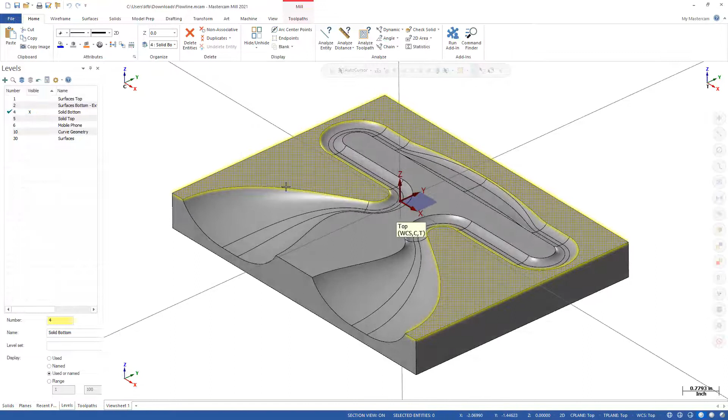This particular file has some geometry that is very suitable for the flowline toolpath. It's a solid file, but I can turn on level 30 and make it active, and turn off level 4. We have a copy of the geometry we want to focus on, and I'm going to hide everything else. So these are surfaces.

If I hit Alt-S to unshade my model, now I'm looking at the wireframe version of it. You can see that most of the surfaces have what I call a grid structure. We have arcs or curves that go across, and arcs and curves that go along. Now these aren't really arcs or curves, they're just a representation of the surface itself.

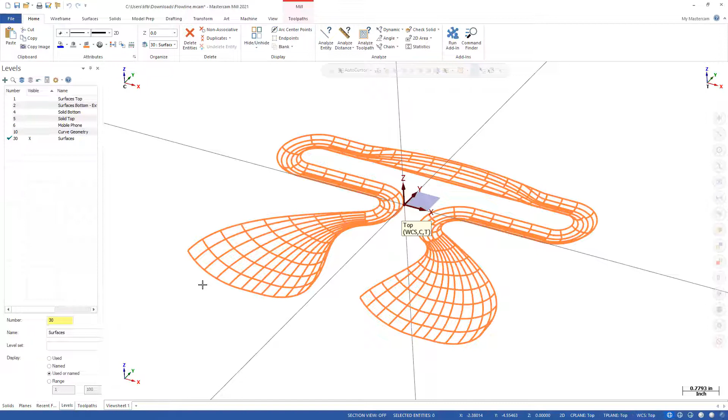Now if we look closely in this area, this seems to have a nice set of what we call UV curves. The UV curves are created on the surface and they show the overall flow of the surface.

But this particular surface here does not have a consistent across and along motion. In other words, we don't have curves that are going all the way around like we do see here and here. And if I tried creating a flowline toolpath, it would either cause errors or give undesirable results because of this anomaly we have here.

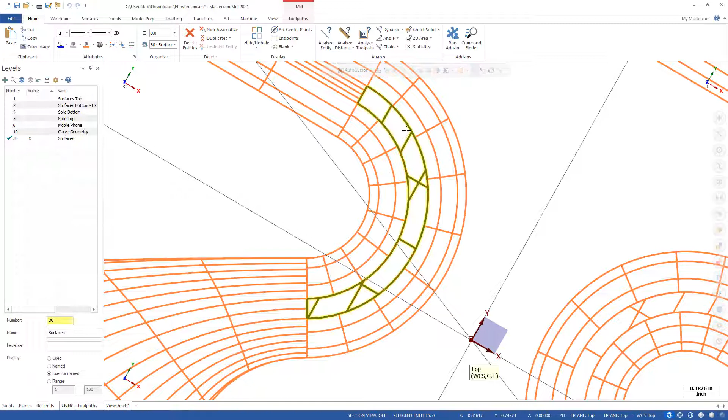You'll also notice we have the same issue over here. And if I zoom out, we have the same issue right here as well. So let's go ahead and hit Alt-S again to shade it, and I'll fit this to my screen.

One of the things we can do before we create the flowline toolpath is adjust the UV curves that form this surface. So if I go to the Surfaces tab, we have an option here called Reflow UV. However, Reflow UV utilizes wireframe geometry to guide it along the surface that you want.

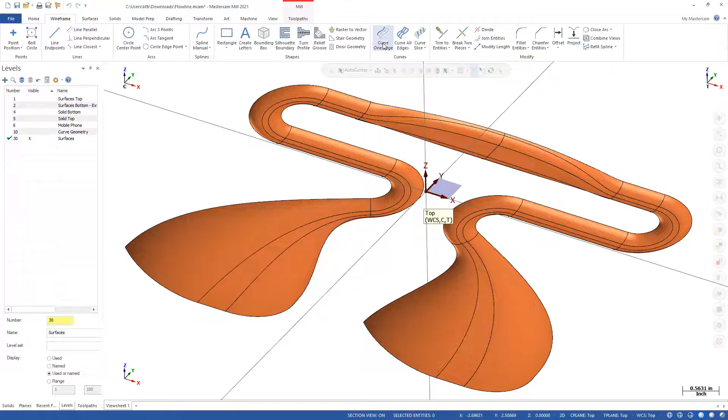So the first thing we need to do is go into wireframe and create curves along these edges. Now I'm in 2D, I'm going to change this to 3D, and create a curve along these 4 edges here. And while I'm at it, I'll do it over here as well, since we know that this was the other surface we need to work on.

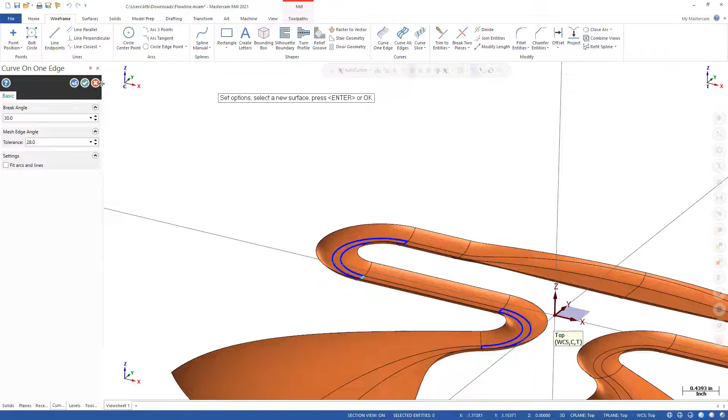Now on the Surfaces tab, I'll go to Reflow UV, and it's asking for a surface. Notice before I select a surface, I have boundary curves selected here, which means as soon as I select a surface, it's going to prompt me for those boundary curves. You can see right here, select up to 4 chains. So I'm just going to select these 4 here.

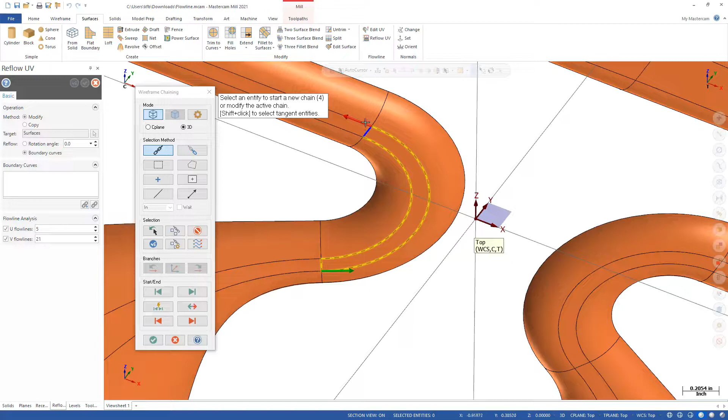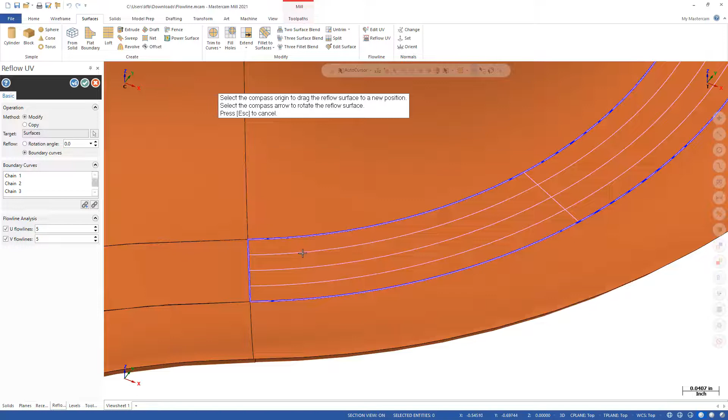When I click OK, you'll notice if I zoom in, we have a lot of curves, but they follow the outside shapes of that surface. So I can adjust this, for example, let's just do 5 V flow lines. Now you see 1, 2, 3, 4, 5. As you can see, we're reflowing the UV curves to better follow this surface.

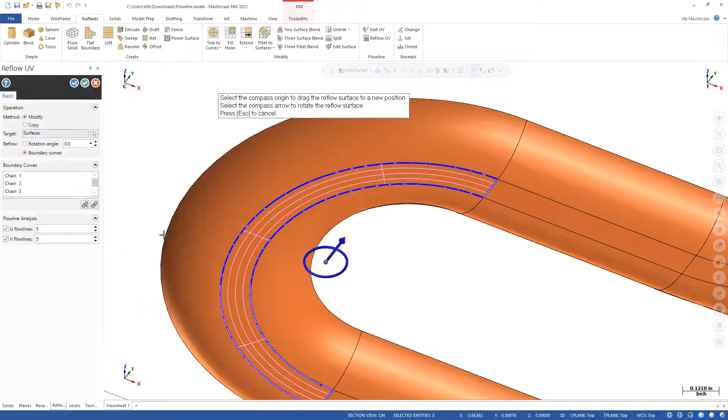So I'm going to hit apply because I want to do it again over here. I select the surface, and I'm going to select these 4 curves. It looks real good, so we'll click OK.

So now, let's take a look at the surfaces again in wireframe mode.

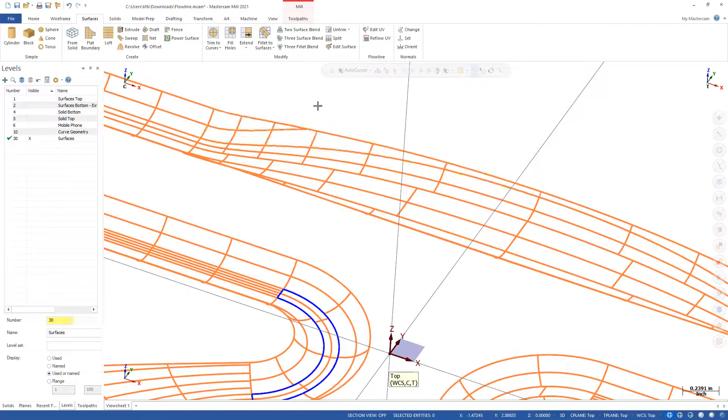And everything looks good. Sometimes you'll see that you have a curve that shows up here and it terminates. That's kind of what the toolpath will do. Imagine if you had a tool come along this shape and then stop and retract. I'll point that out because we may see that in the end result. And we're not going to go in and modify the UV curves of this surface, but we certainly could.

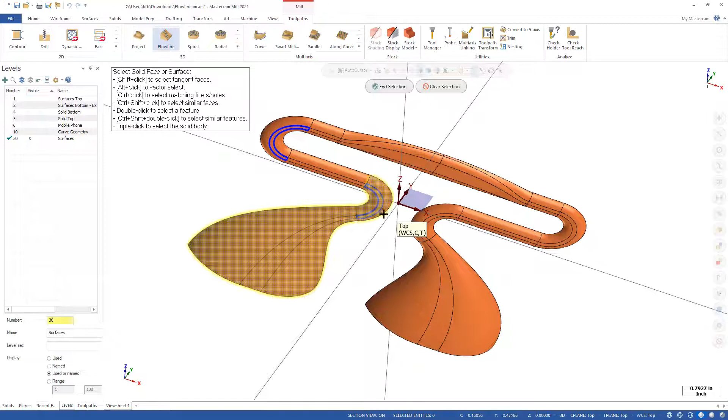So to access the toolpath, we go to Toolpaths, and then it's under the 3D gallery, and it's called Flowline. I'm going to select these surfaces here. Of course, I could window select, but I'm not going to select every surface, which is why I'm not window selecting. And I forgot that one. So we got all the surfaces.

Now when I hit end selection, we get this toolpath surface selection window that pops up. This is a little different than what we've seen in the past, and this is specifically for a Flowline toolpath. The big option down here is what I utilize a lot. It's called Flowline, and here's where you can look at the various contours or flowline data of the geometry selected.

So as an example, let's move this over here. We have cut direction, and by clicking on it, it'll alternate. Now the cut direction is along the shape. Imagine if this is the river and the water is flowing along the river - that's how this cut is going to be made because of the cut direction. If we change this again, we're now going back and forth across the river. So we're going to change this back.

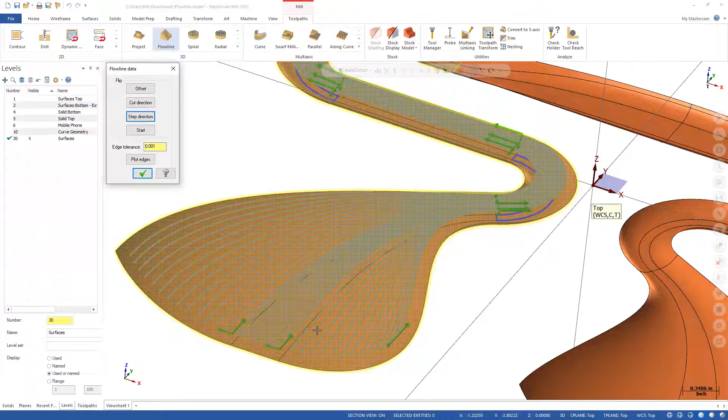We also have offset, if you wanted to offset it below or above. And step direction, if you wanted to start up here and go to the right, or start here and go to the left. As you can see, we have the cut direction going this way and the step direction going down. So we should see that with all of these pieces of flowline data, and we see it for all of these as we go around to the end.

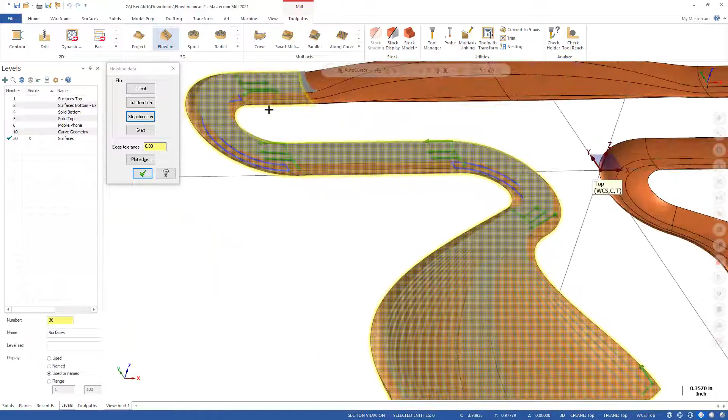So, as you've gathered by now, what I like to do is click OK and go into the toolpath, and we can always make changes later. So we have the 15 drive surfaces. And if we wanted to do a check surface, which would be a surface to avoid, we could add that. I'm just going to click OK and go right into our surface finish flowline parameters page.

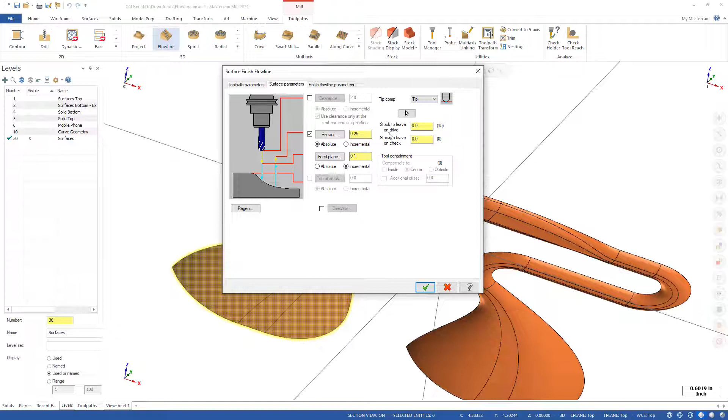We're going to use a 1/4 inch ball end mill. Let's call this flowline. Under the surface parameters, we have our traditional settings for stock to leave on drive surfaces and so forth. But under the finish flowline parameters, here's where we can choose our step over and our cut control. For now, I'm just going to accept the defaults and note that we have zigzag turned on. And I'm going to click OK.

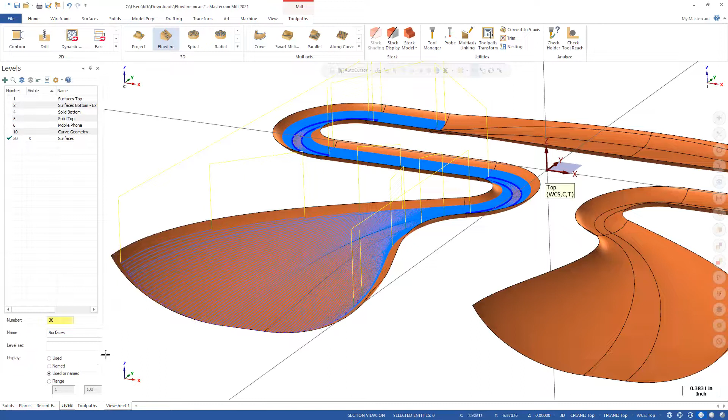So what we have here as a result is some pretty efficient and very smooth flowing toolpath motion that follows the overall shape of this surface. If I go to the Toolpaths tab and I backplot this, I'm just going to hit play. You see how it goes back and forth along the entire shape of what I call the river, from one side working down to the bottom, and then back up the other side.

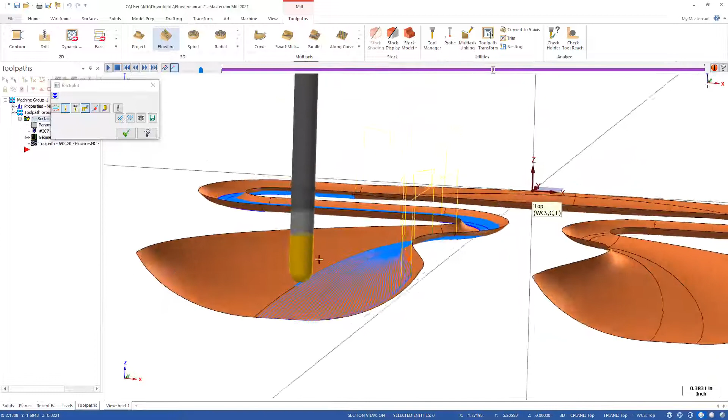Now if we look at some of these retract moves here, we can control that with our gap settings and possibly even changing the flowline data. If I click OK here, in shade, you'll see that we have the nice flowline data that goes all along this surface, and it continues on all the way around.

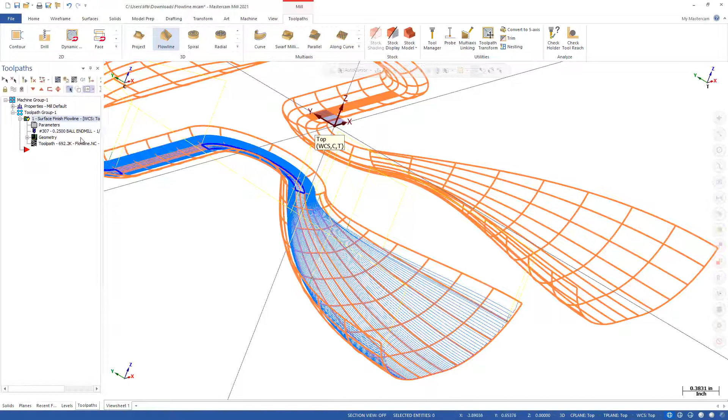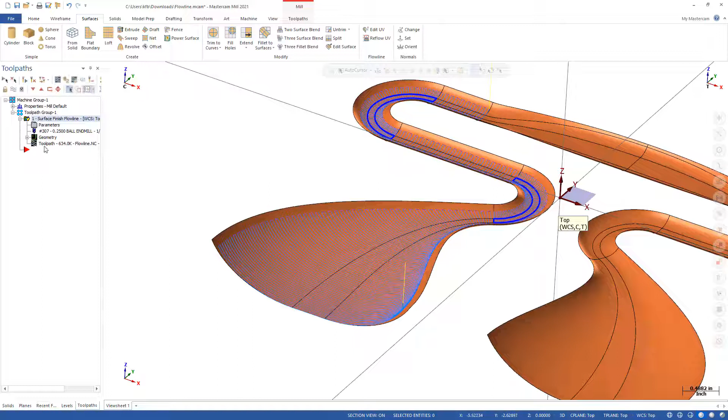And again, if you wanted to change the cut direction, you could go back into your flowline data, and we'll change the cut direction. So click OK, and then we'll regenerate this. So now you can see we're going back and forth from one end to the other.

So in this example, we explored some of the flowline toolpath parameters. Now understand, for this type of toolpath, it's very suitable for certain types of geometry. In this particular case, this is a very good example of how you can utilize flowline toolpath data to get the desired toolpath that you'd like.